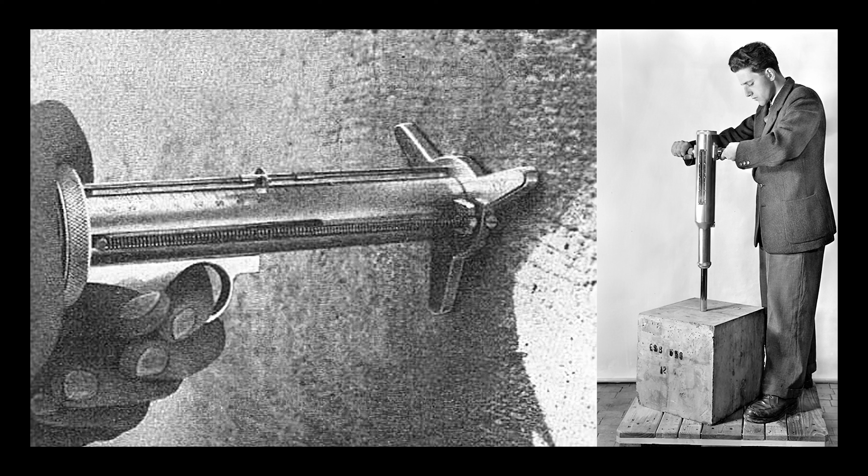Screening Eagle started its contribution to protect the built world back in 1954, almost 70 years ago, with the launch of the first Schmidt hammer. This prodigious invention, done by our invaluable daughter company Proceq, revolutionized the concrete characterization space with an NDT approach, until then limited to destructive testing.

Since, continuous new inventions have populated our portfolio with a plethora of new solutions, such as ground-penetrating radar, half-cell potential, eddy current, and many more. As a result, today, we offer our customers the largest portfolio of portable non-destructive solutions for concrete health assessment.

Alongside this, computing power seconded by Moore's law has continued doubling every second year, and thus continues giving smaller and more powerful portable devices. To give a reference, today, the latest tablet generation has twice the computing capacity of the, at the time, largest supercomputer in 2001, with more than 8,000 processors and an equivalent cost of $187 million.

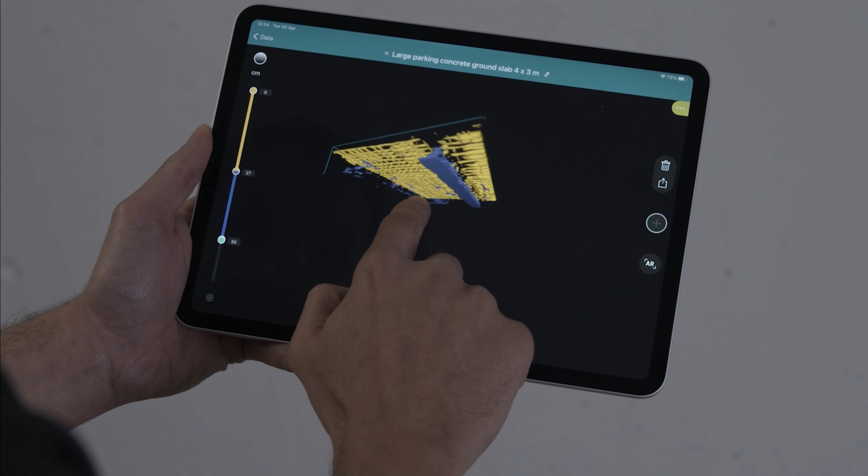Screening Eagle very early saw the benefits of this computing trend and decided to leverage it, thus redefining the way NDT sensors were understood until then. A completely new approach that combined the best of two worlds: unparalleled data collection sensors with powerful and user-friendly software. Today, this approach remains more valid than ever, and since its adoption, it has empowered our users with many new innovations not seen before, such as IoT connectivity, real-time post-processing, augmented reality, and many others.

But what drives all these innovations? Primarily, our self-defined mission is to protect the built world with innovative and true added value solutions. We strive to empower the different stakeholders in their respective roles across the value chain, from inspectors and engineers who seek more efficient methods and better quality data, to also asset owners who aspire for data insights-driven decisions. Secondly, our passion for engineering and our motivation to provide our customers with the best solutions in class.

But why must we care about protecting the built world? The built world provides the necessary infrastructure for our economies, our society, our lives. Bridges, tunnels, airports, hospitals, schools, our homes. All that is the built world.

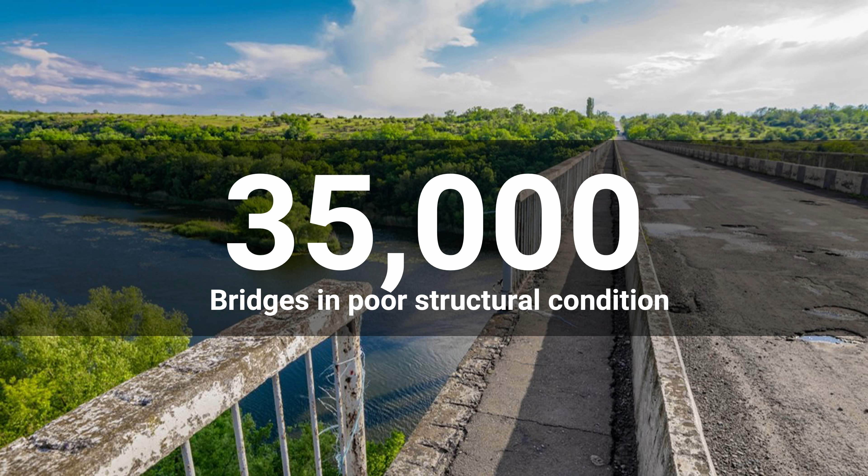One might think of rebuilding everything again, but finance and sustainability reasons speak very strongly against that approach. For instance, the value of the world's real estate reached $330 trillion in 2020. To put this in perspective, this is almost 5 times the capital valuation of the 10 largest stock markets in the world.

In addition, the construction industry continues to be one of the largest CO2 emitters, with a contribution of around 12% of the total CO2 emitted to the atmosphere due to direct construction activities. In other words, reconstructing everything again is not a feasible solution, but rather to develop long-term strategies and implement efficient actions that preserve our existing built world.

Now, an indispensable aspect of protecting the built world is to have an accurate and extensive condition assessment, which initially starts with visual inspections. Visual inspections are the most common type of inspection. They are straightforward and relatively cost-effective, serving as a baseline for the structural health assessment of the asset.

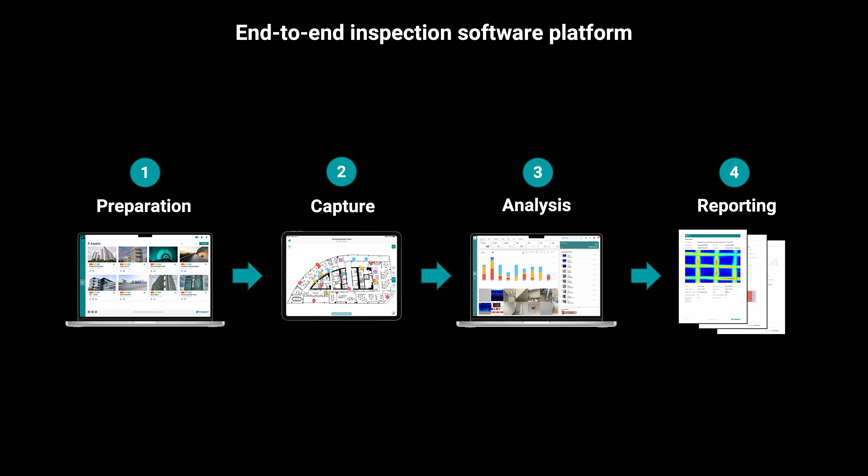Inspect is set up for real-time team collaboration from anywhere at any time. The software helps inspectors and engineers to manage and document their work from job preparation, field data capture, data analysis, all the way to reporting to their clients, the asset owners. All your workflows can be digitalized and customized easily as per your needs within minutes.

Remember, the essence of any inspection is location, and hence why we put location at the core of our solution. That means that all captured data is simply layered on that very location, which we call spot. And here is how the core of Inspect works. To make sure that you don't forget anything while being on site, you can prepare and structure a checklist as a guidance and ensure that you're compliant with local and international standards.

While being in the field, we understand that speed matters for you. The fully customizable, structured data collection empowers you in your everyday job and reduces data collection time to a minimum. It has never been so easy to capture photos of your findings and map them to a location onto a drawing, picture, map, or 3D model.

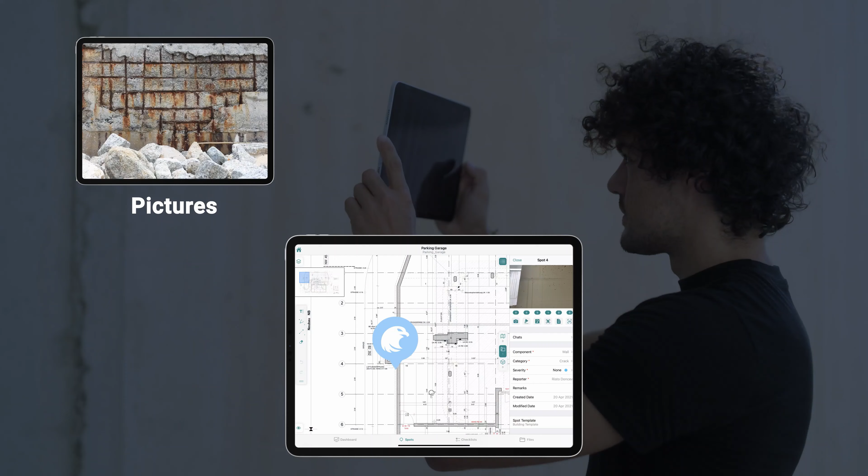Add any additional info that you find relevant to put the data into context. It can be just a comment, 360 picture, video, 3D scan, or sensor data. Any combination that you want and need is possible. All data is stored within the spot and is easily retrievable at any time.

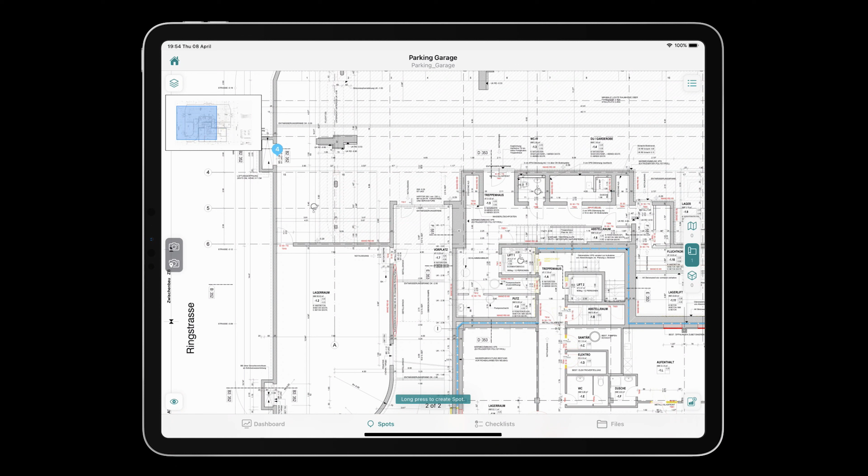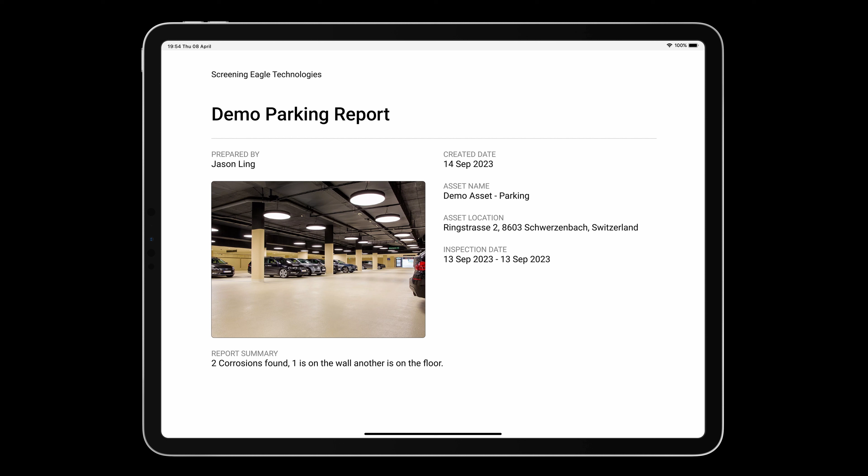The superpower of Inspect comes into play once the field inspection is done. Thanks to the structured field data capture, with only 3 steps, you create a fully customizable and actionable report in a PDF, CSV, or even Word format within less than a minute out in the field itself. That's it. Job done. This is powerful.

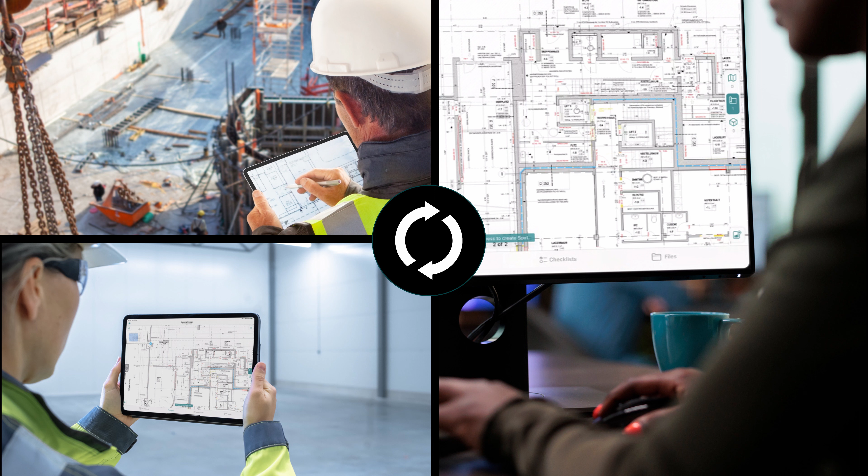This is Inspect. What's more, all of your field data capture is available across different platforms with all your teammates, and everyone has access to absolutely the same data set in real time. This is great. The result of using Inspect? Massive productivity gains along the entire inspection and assessment process saves you time and money, enhanced quality of inspections, and ensured compliance and traceability. And lastly, accessibility of data and documentation even in years to come.

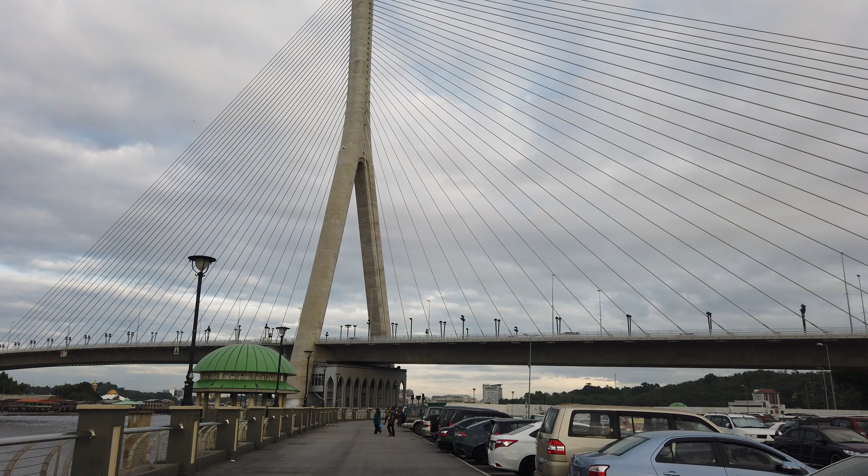To convince yourself, let's hear what our customer VSL out of Asia loves about Inspect. Inspecting the impressive bridges of Brunei is a crucial task for Narciso Pikuriwad and his team at VSL International. In the past, the team used traditional inspection methods, which proved to be time-consuming, with frequent revisits to the same site.

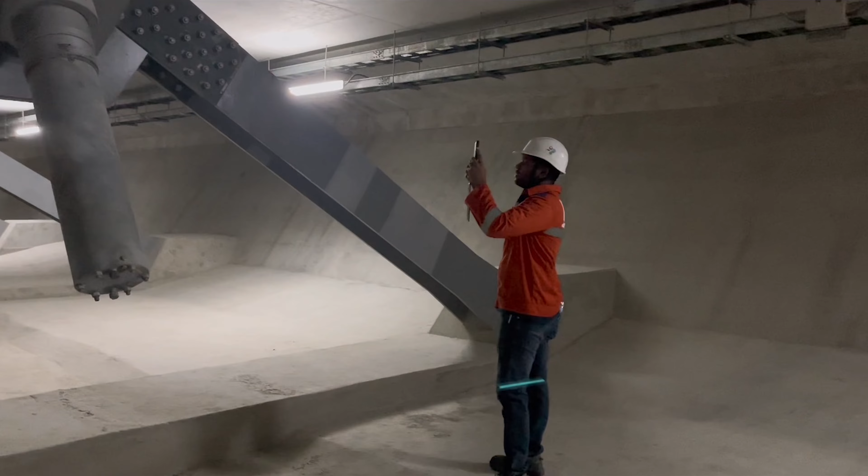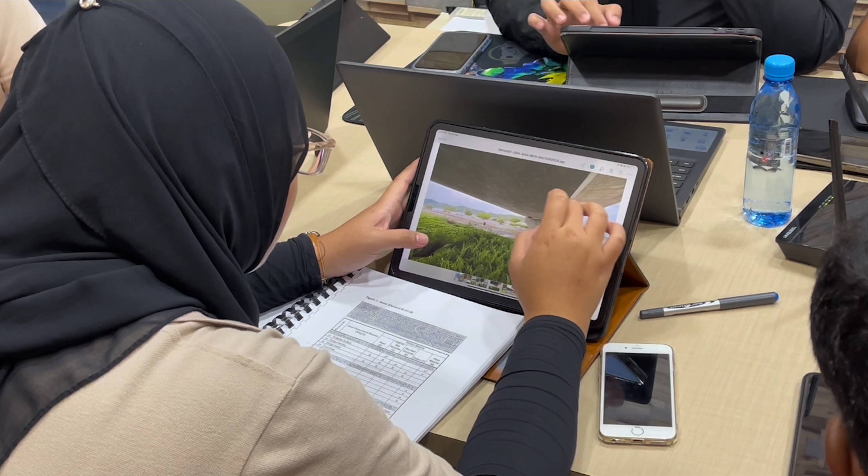Now, Narciso and the team use intelligent inspection software to collect, manage and report the data quickly and easily. All data collected in the field can be viewed in real time at the office, so the inspector is free to move on to the next site. The team's efficiency helps to keep Brunei's bridges safer for everyone. Fantastic to see how Inspect adds value to their daily life of bridge inspection.

Building on all of this, I'm excited to announce to you Inspect 4. This release elevates the ease of use, data flow, and much more, bringing Inspect to a completely new dimension. Inspect 4 comes now with a newly designed iPhone app focusing on the core functionalities for inspectors and engineers to do their jobs even better.

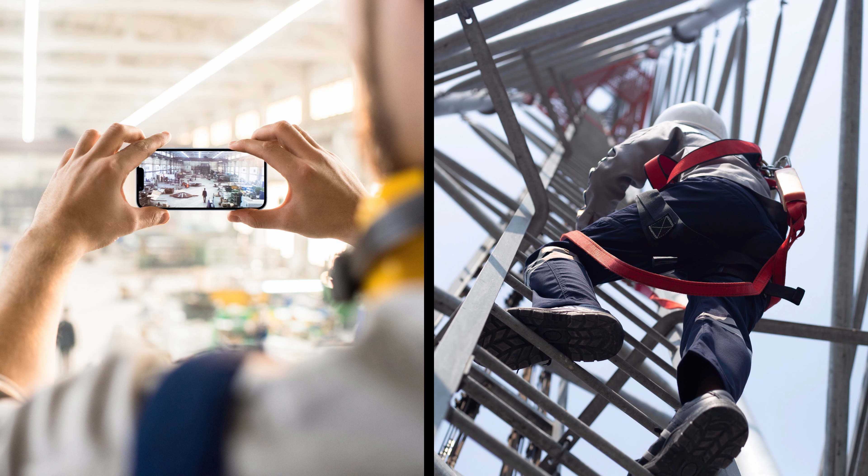Now you can leverage the powerful iPhone camera for brilliant picture taking, enjoy a comfortable user experience with the lightweight of the device, and are enabled to use both hands when required. The newly introduced widgets make you even more productive in the field, allowing you to configure your field dashboard yourself as per your needs, available on iPhone and iPad.

And for those who want to use an even more powerful camera in the field where direct access is not possible, we have you covered with our mighty automatic photo sorting feature. Simply upload your pictures on the web interface, and our software algorithm does the rest for you to sort them out to the exact spot location within Inspect. Just like magic.

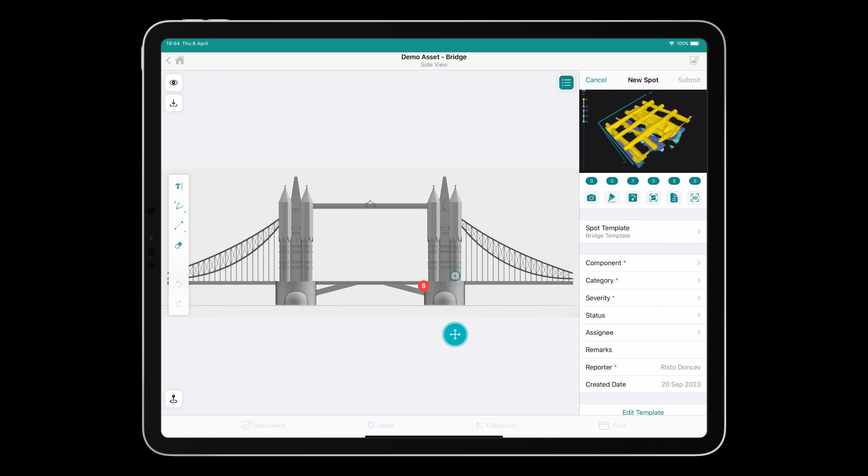Shirley, tell us what else Inspect 4 can do for our customers. Thanks, Risto. That's a big help in gaining deep insights. With Inspect, you can link sensor measurements to any spot. You simply choose the measurement data out of our concrete sensor portfolio, and automatically the raw data and all the metadata is copied within Inspect. This deep link guarantees full traceability for future investigations.

Customers have asked us repeatedly if the visualization of the sensor data can be overlaid onto the 2D drawings. Why is that? Well, because the overlay enhances the contextual information entirely for better assessment. I have amazing news for you. As of now, in addition to the sensor deep links, visualizations of the sensor can now be overlaid onto the 2D drawing. Look at this, for instance.

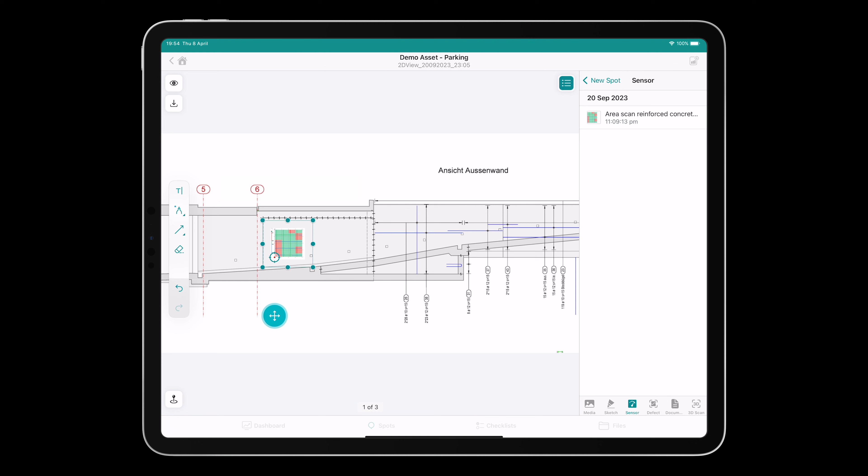It's a heat map of a cover survey on a wall, but without any context, it has limited value. But with the overlay on the drawing, it completely changes the perspective and makes it immediately understandable. Now you know exactly where the hotspots are for repair in real life, and the overlay can be put onto the scale, making your cost estimates easier and more precise.

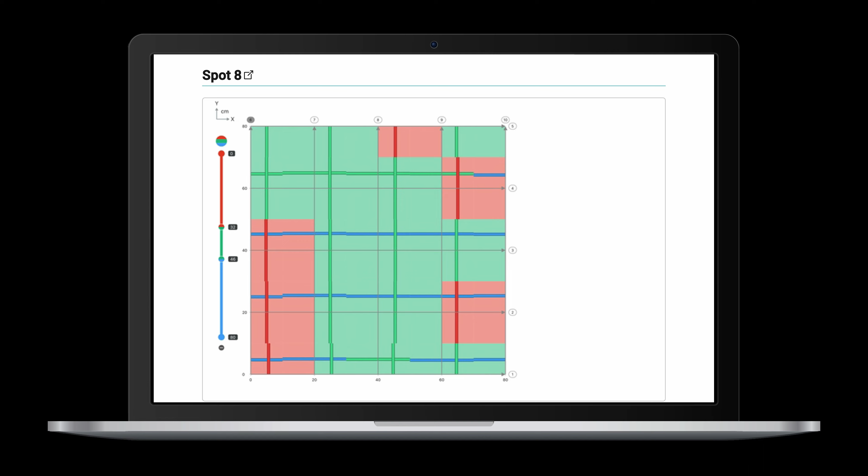You can also adjust the transparency to see the original drawing at the same time, giving you a complete understanding of the full structure. But what's more important is that it massively facilitates and speeds up the reporting process of your NDT scanning. So no need to extract the data or use different tools to put the report together anymore. This is fantastic and demonstrates the power of our Screening Eagle ecosystem.

As Risto mentioned, spots define the point of location of observation. Distinct colours allow you already to differentiate between different defect categories. To enhance visually the information content of the spots, Inspect 4 introduces custom markers and brings customization to the next level. So spot signs can be predefined using different shapes, colours and borders and transparency settings.

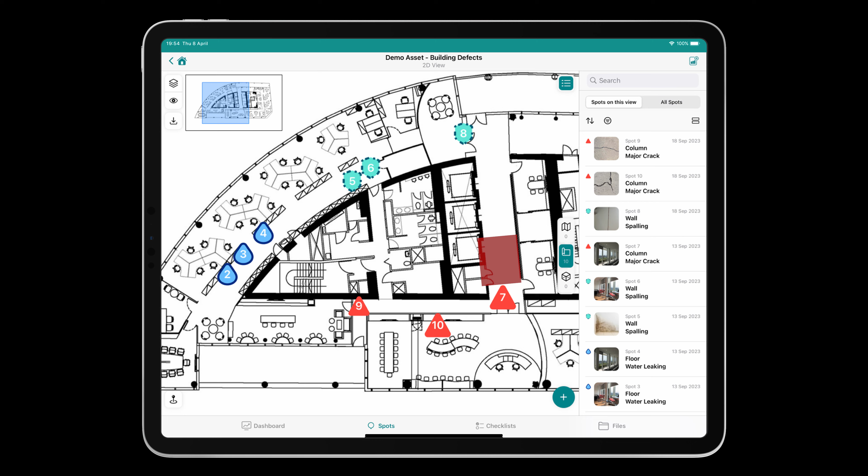And even better, we can draw any annotation to a spot to highlight certain areas. This newly introduced capability shows you at first glance all of your observations as per your company standards and customer requirements without any constraints, and will boost your field productivity and secure the quality. Let's talk about data flow now. For this, I have my colleague Florian, who will tell you what the design and engineering team have been working on for Inspect 4.

Thank you, Shirley. Our customers love Inspect because it's by far the most intuitive and powerful app when you're in the field. Better than every other product on the market. But what if you want to bring data out of Inspect and into your own system? Or what if you want to improve the way that you capture data, but you still need to keep your legacy system?

Well, today we are proud to introduce Inspect API. With Inspect API, you can now connect to any system that you can imagine. It provides information in real time out of Inspect without having to export to Excel. We built a RESTful API that allows you to fetch all your assets, spots, and reports through simple HTTP requests. We're very excited to show you what it can do.

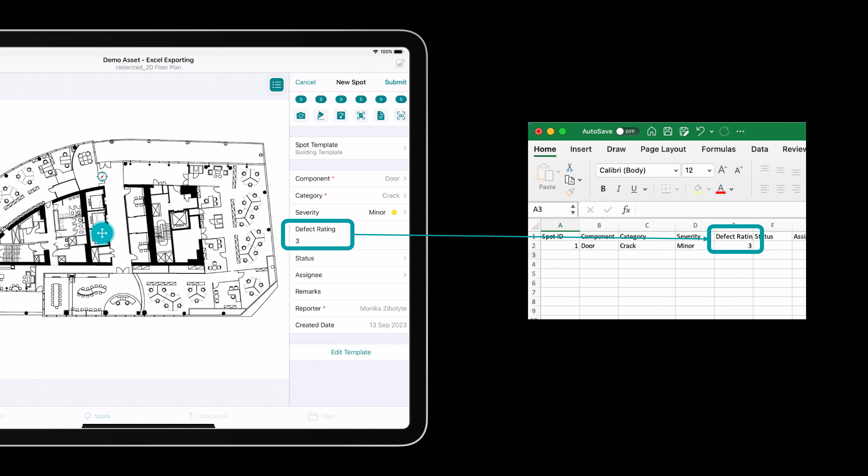To facilitate your workflows further and ensure your company's knowledge is preserved, we will provide Excel integration directly into Inspect by the end of this year. For example, a bridge inspection condition index calculation or periodic asset assessment according to your local standards can be fully used and leveraged within Inspect. Data inputs from the field will be incorporated into your existing files, avoiding unnecessary duplication of work. This will truly bring a new dimension to the whole game.

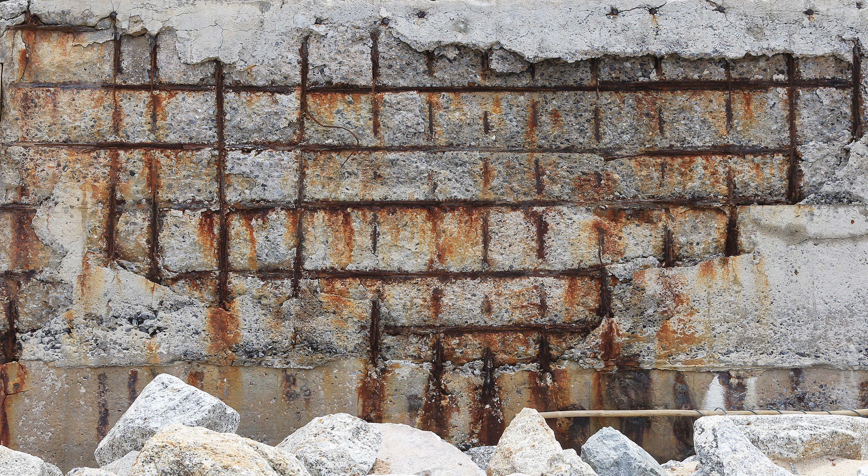Now, despite visual inspections being extremely important, often the findings of those inspections are not conclusive enough, or they just open the door to new questions that require deeper investigations with NDT sensors. In this sense, corrosion is the durability issue that is regularly found and reported by inspectors and engineers in concrete structures. In fact, corrosion is a current major global challenge.

The cause of unserviceability, such as bridge closures or unsafe buildings, and the total cost of repair is estimated to be 0.303% of global GDP. This means $300 billion in 2022 alone. Imagine the GDP of an entire country like Colombia or Finland just disappearing because of corrosion in concrete.

Screening Eagle offers a uniquely extensive portfolio of sensors for the assessment of concrete corrosion. Cover measurement, half cell, resistivity, and concrete permeability are some of them that our customers leverage in their structural assessment.

But now, here is Hussam to tell you more. Thank you, Antonio.

Sometimes corrosion is not yet visible to the naked eye, but there is enough engineering evidence to justify a corrosion assessment. In other cases, especially in old structures or extremely aggressive environments, corrosion issues are very well advanced and visible from the outside. In these cases, the inspector and engineer might want to evaluate the extent of the problem, if there are associated damages to the concrete, like cracking or spalling, and whether the problem is extended into other areas where the effects of corrosion are not yet visible from the outside.

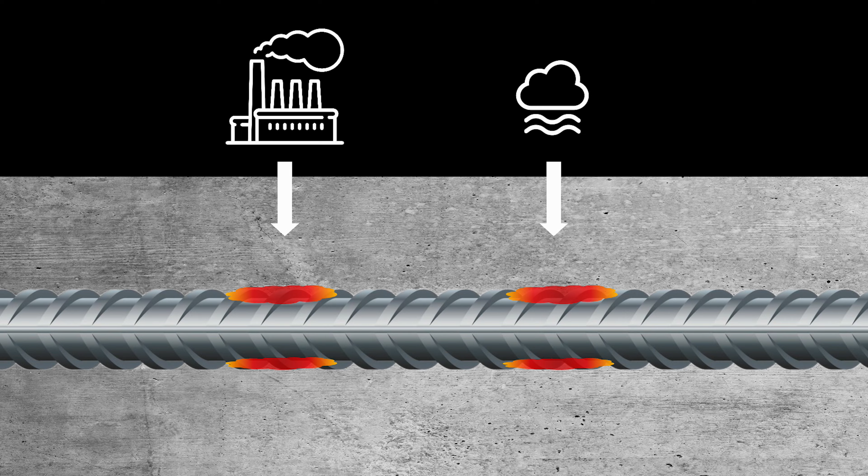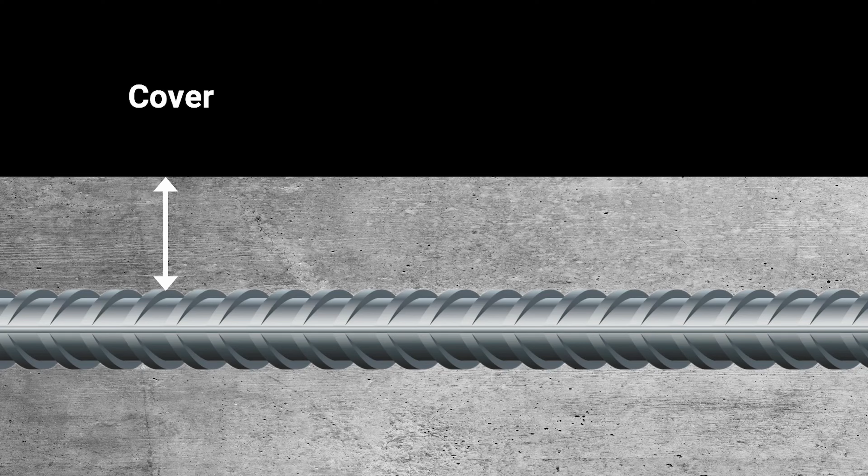Although every structure is different, the factors inducing concrete corrosion are commonly repeated: not enough concrete cover, concrete carbonation, high chloride environment, and other concrete characteristics. There are 3 risk factors increasing the possibility that corrosion will happen in concrete structures. The first risk is an insufficient concrete cover. Indeed, that's your protection along the concrete structural life. The lower the concrete cover over the steel rebar, the faster the aggressive elements reach the steel.

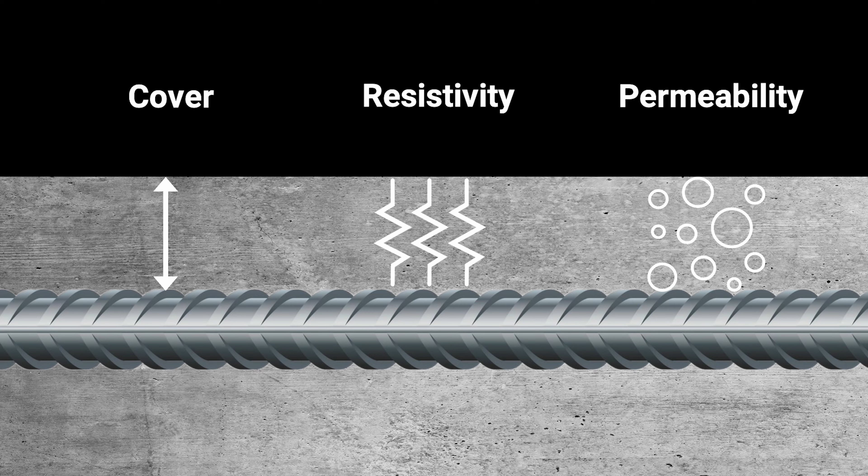The second factor is concrete resistivity. A low concrete resistivity allows the corrosion, if present, to speed up. And finally, the third factor is concrete permeability. A high permeability makes it easy for aggressive elements to penetrate and attack the steel rebar. That's why we recommend a multi-technology approach for assessing those 3 risk factors.

For measuring the concrete cover, the Profometer PM8000 family offers a wide range of cover meters according to your applications, from punctual cover measurements with the newly released PM8000 Lite to mapping large areas with the PM8000 or PM8000 Pro introduced last year. For estimating the concrete resistivity, the ResiPod is the most reliable sensor to use. For evaluating the concrete permeability, the Torrent is the only existing on-site sensor in the world.

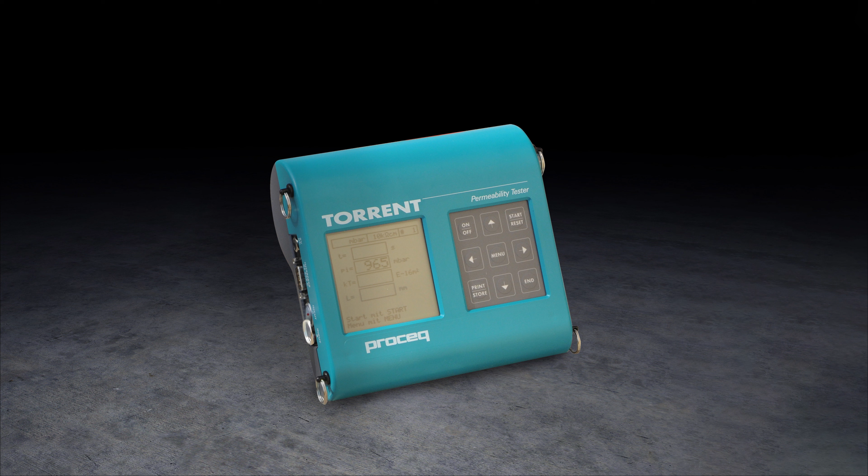Knowing the risk factors is essential to consider concrete strengthening works. But what if the corrosion is already starting? Yes, it might be already active within the concrete, and you might not see it at all. As a preventing action, you should then estimate the likelihood and speed of corrosion. For that, half-cell potential technology is the most proven and standardized technology in the world.

By detecting corrosion early with electrodes, the repair is more targeted, more affordable, and takes less time to implement, making the structure more durable while maintaining its serviceability. We've been the leader in half-cell potential technology with more than 30 years of experience. And we keep innovating by presenting to you today the newest generation of half-cell potential technology.

Hi, Rosaly. Tell us what's new. Thank you, Sam.

Welcome to the Profometer PM8500. The product consists of a half-cell potential sensor system connected to the Profometer app, and it's integrated with Workspace, our data storing and sharing platform. A state-of-the-art wireless sensor system consisting of 2 parts.

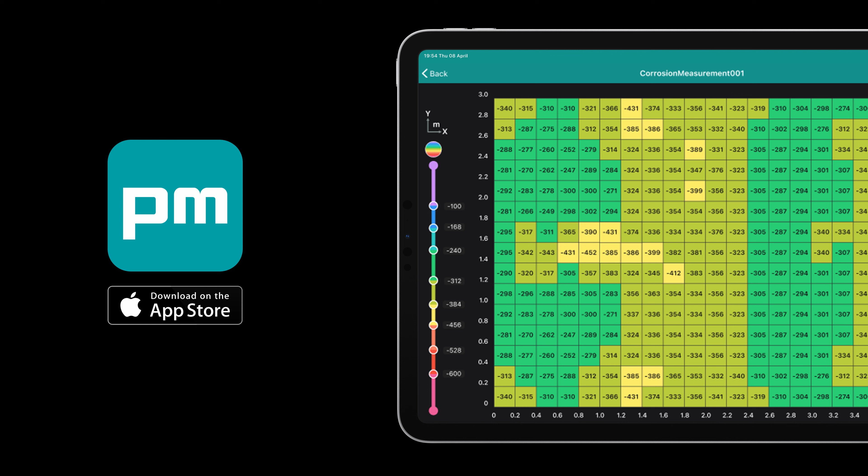Concerning data processing, it's a new world that we offer to you with the Profometer app enriched now with the addition of the Profometer PM8500. We bring you exceptional data visualization with flexible, customizable grid, up to 10,000 square meters large scan capacity, which corresponds to a size of 2 football fields. Perfect for any type of inspections such as underground parking columns, walls, slabs, or bridge decks.

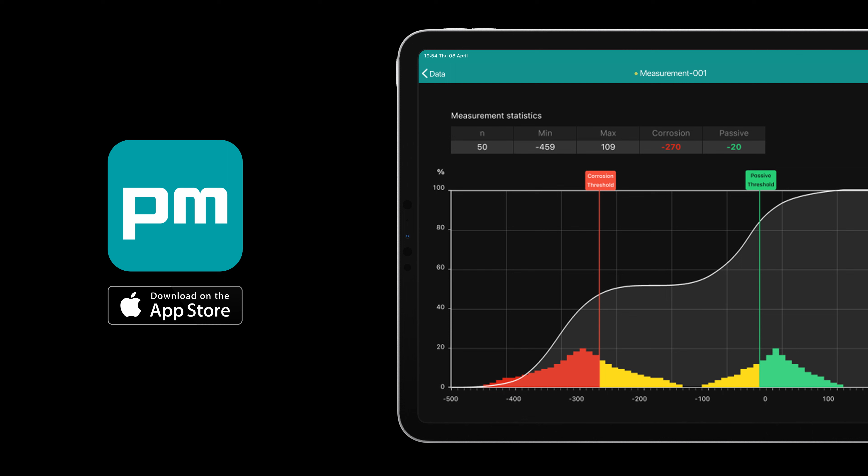The data processing is faster than ever with very easy navigation across the different views. You get real-time on-site results such as the raw potential map, statistics views, and the chipping graph, all helping you to identify the corroded areas for further investigation and repair. With Workspace, you can collaborate and share immediately from the field with your colleagues and clients. Again, we made sure to offer a wide range of options to meet your inspection needs.

This solution is available now. Prices start from 6,490 Swiss francs with the standard kit.

Now, Antonio, back to you. Thanks, Rosaly.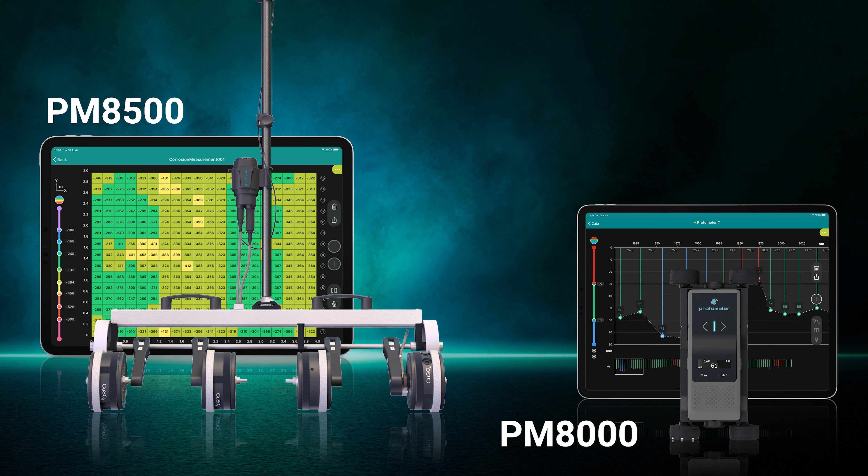The new PM8500 is a fantastic addition to our portfolio of concrete IoT-connected sensors, being also the perfect companion to the PM8000 family for those customers who seek a detailed and complementary solution when performing corrosion assessments. But this is not all. You can as well represent your corrosion measurement directly in your PDF project drawings, thanks to the seamless data overlay in Inspect, a truly innovative solution.

But there is something worth mentioning. The risks for our built world do not only come from aging, lack of inspection or maintenance. Often, project modifications requiring drilling or coring or new project construction needing underground changes represent a huge exposure for our built world. Frequently, those exposures are translated into multi-million additional damage costs, or in other cases, unfortunately, into terrible casualties.

The underground built world is especially exposed to this problem, where there is a whole spaghetti-like network of utility infrastructure coexisting with the lack of reliable data. To tell us more about this problem and our geomatics solution, here is Gorka. Yes, Antonio.

There is a big missing piece, the non-visible space below ground. If only we had an accurate model of the buried network of utilities, we would be able to check before digging and prevent thousands of utility strikes every year. 3 years ago, we entered the world of subsurface mapping with the introduction of the GS8000, an innovative radar-based system able to intuitively provide a solution to any detection and mapping task, from utility locating to advanced geophysical applications.

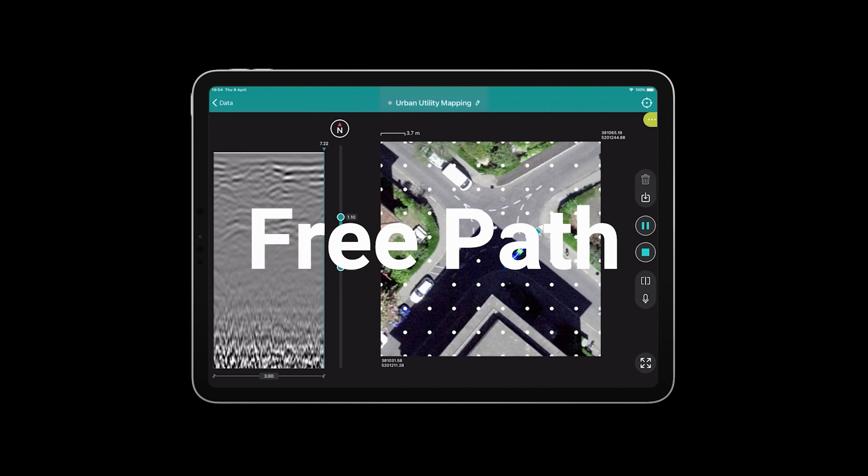David, tell us, how has the market received the GS8000? Hi Gorka. Our customers simply love the GS8000. They love how intuitive it is to use. They love the performance of the step frequency GPR technology. The trade-off between data resolution and depth allows them to use one system for multiple applications and save money. They love FreePath, the unique methodology that made grid scanning redundant, saving hours and hours of field work.

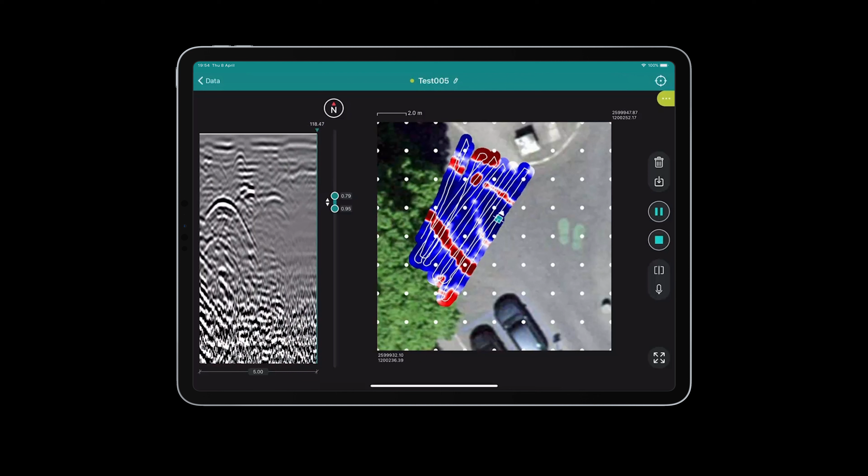They love how the data is processed in real time and presented in a map immediately to avoid interpretation errors, and create a digital copy of the scan site and job done that can be shared with one click to anybody over the cloud. People simply love the GS8000. But Gorka, there's one thing I've got to tell you. Our customers see the potential of the technology, and they ask me all the time questions like, how can we make the GS8000 cover larger areas?

I am glad you asked that, David. This is the reason why we are here, actually. Today, I am glad to introduce you to the new addition in the Screening Eagle subsurface family, the multi-channel GPR system that will revolutionize hand-pushed operations, the GS9000. As you can see, it is very compact and robust, made of lightweight carbon fiber that keeps radar signal intact. It is a true Swiss-made piece of art. The principles are the same that made the GS8000 famous.

Versatility, thanks to the ability of stepped frequency GPR technology to provide the best detection trade-off between resolution and penetration. Efficiency, to scan your own path freely and visualize results as a live tomography in a map. And simplicity, with a user interface based on simple gestures that allows you to digitize and share data as easily as you could ever expect.

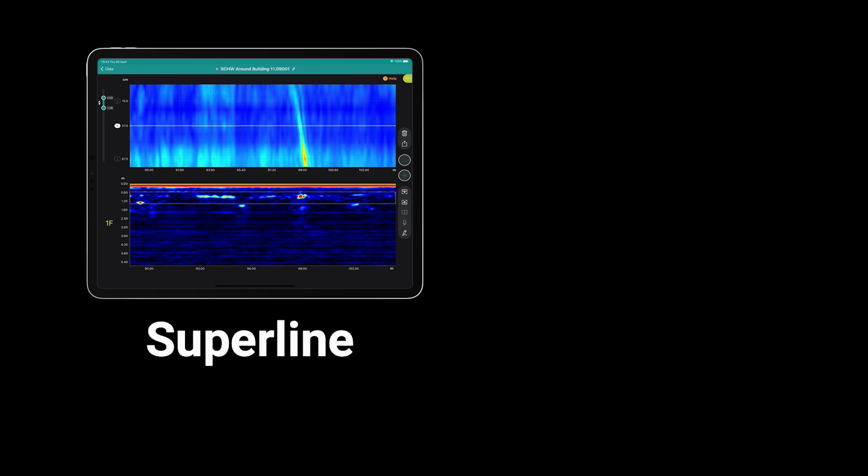And it is up to you whether you visualize the information as an infinite swath that we call superline, or in an accurately georeferenced tomography that we call free path. Both maps are live. You just need to swipe on the screen to change. As the result of all of this, the same area can be covered up to 30 times faster, bringing a completely new level of productivity to the field.

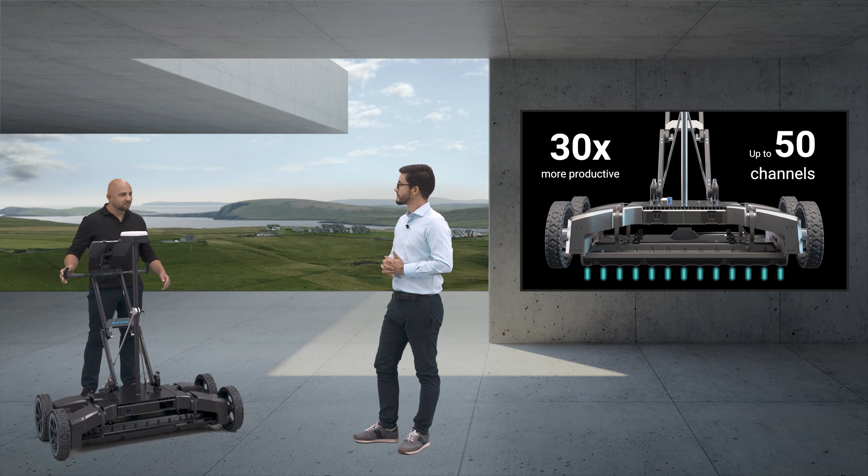This is awesome. I've been dreaming of this for years, and I'm sure our customers will love it too. I can imagine how this will simplify GPR operations before digging or trenching and speed up all types of surveys. No matter if utilities, geology, archaeology, bridges and structures, all in one system. But now, Gorka, I double down my question. Can you make it work on a bigger scale? The answer is indeed yes.

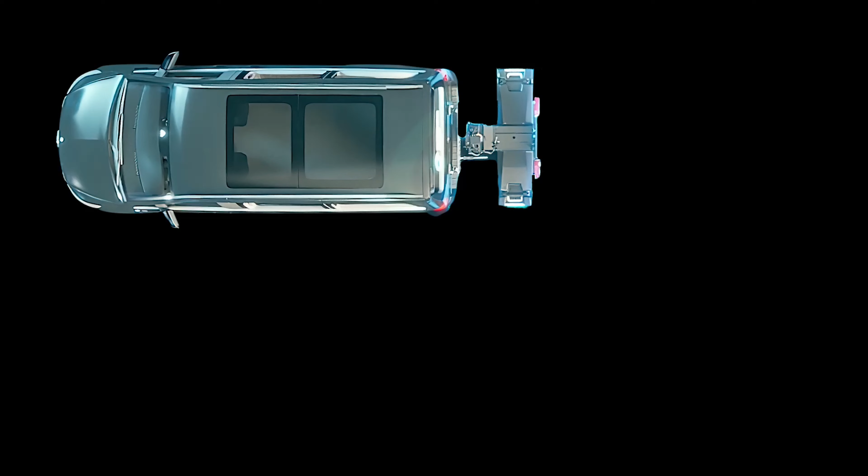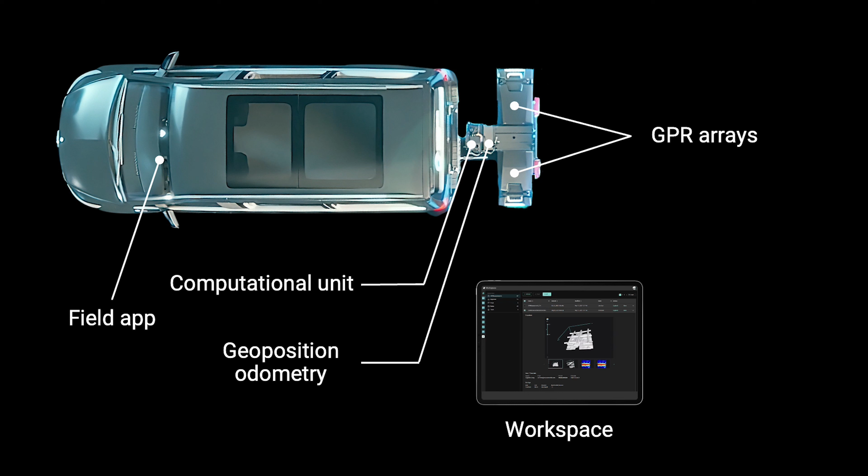Now, let me introduce you to the first true mobile mapping system for the underground, the GM8000. A fully equipped system to bring subsurface mapping into a new dimension, thanks to the perfect integration of all the pieces that only Screening Eagle could combine. Multi-channel GPR array sensors, precise geopositioning and odometry, a powerful brain unit to compute all those data at high speed, an intuitive app to control the whole system during data acquisition, a virtually limitless data management system called Workspace, and the most powerful analysis software, GPR Insights.

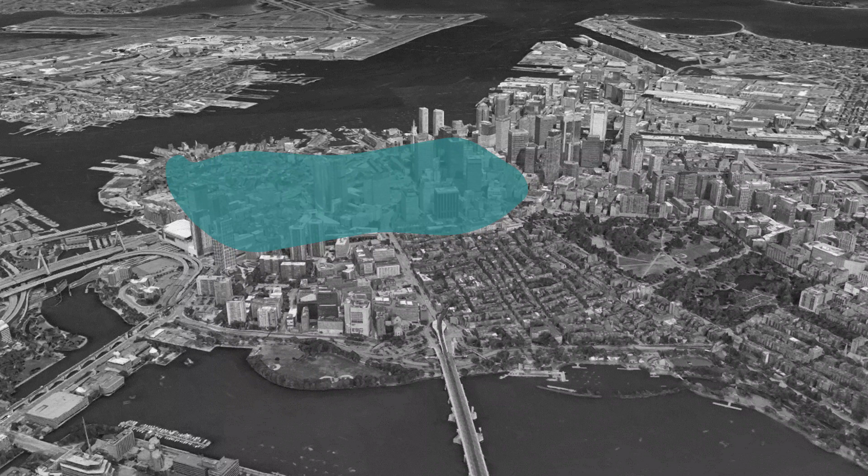The GM8000 is designed to be towed by a vehicle. It is super simple to mount, even by a single person, and in less than 5 minutes. Thanks to the Screening Eagle patented GPR technology, with its broad bandwidth of stepped frequencies above 3 GHz, you always keep a high dynamic range, which speaks for the highest data quality across all channels, and now also at highway speed. This allows the GM8000 to cope with utility mapping, geophysical or archaeological surveys, as well as bridge or pavement analysis projects, with nothing else than a simple click out and click in of the corresponding GPR array module.

There are two modules, GX1 and GX2, tailored for near surface and deep detection respectively, to have you always covered. And you know what? The modules can be swapped with the GS9000 because they are the same. It is a truly modular system. But this is not everything.

When mapping cities, there will always be buildings or canopy where GPS positioning is just not enough. Even when combined with inertial sensors, geopositions rapidly drift in tunnels or indoors. The answer to this is visual inertial positioning. 3 technologies combined and integrated into a dependable street mapper that knows precisely where it is, anytime, anywhere.

Now, you will be asking yourself, how can I visualize all those gigabytes of geophysical and geospatial information? Very simple. They are accurately plotted into a map in your field computer. No, not just a GPS trajectory, but a live time slice, so that you do not miss out on anything as you are driving. So, to your question, David, the GM8000 is more than ready for the challenge of mapping the subsurface of complete cities and highway networks. Now, let me recap in a short video all the new solutions presented so far.

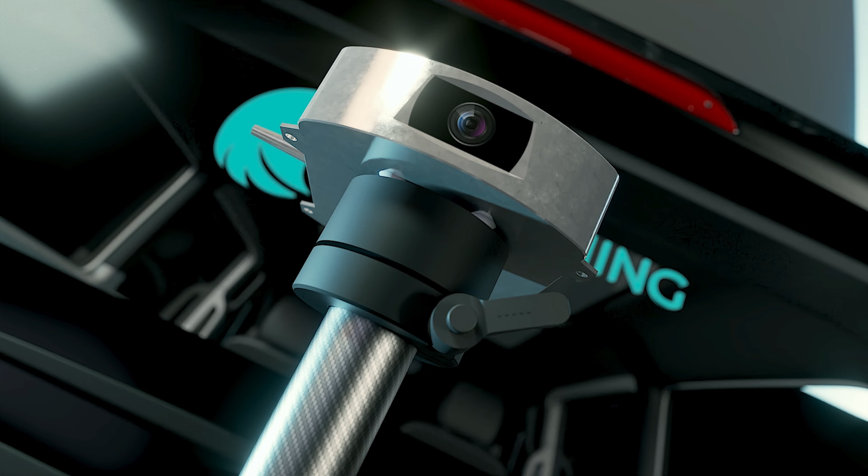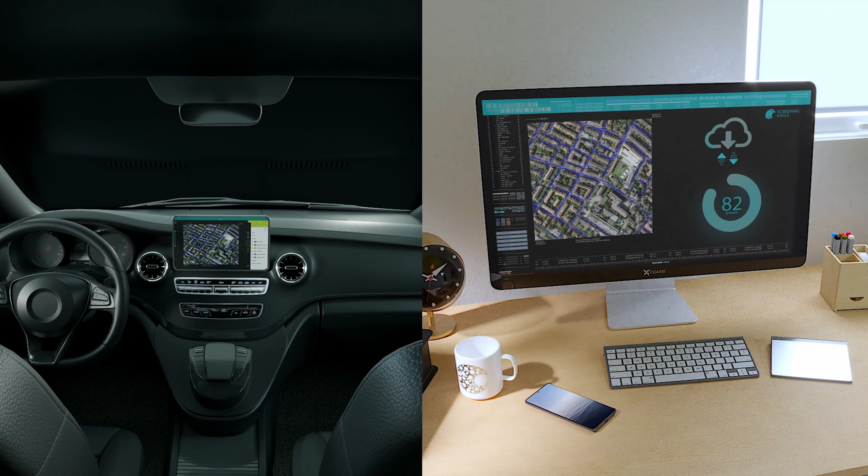Amazing. This opens up a completely new dimension for our clients. Now I can see the digital twin of the underground becoming a reality. And I guess things become tricky here. What about processing all that data? I hear the current pain in the industry, shipping hard drives from site to office, computers getting stuck while processing large amounts of data, data security concerns, or even worse, data losses. Tell me, is there a way of bringing a superior user experience when sharing and processing large amounts of data?

Absolutely, David. We are very aware of these common issues with big data, which are not exclusive of GPR, by the way, and we aim to provide the best possible workflow no matter what. A workflow that begins with the simplest upload process you can possibly imagine. Just select your recipe and let the magic happen. By doing so, a sequence of predefined tasks will run automatically behind the scenes. No need for manual pre-processing. Your subsurface project will be ready to start the analysis as soon as you open it. This and much more will be possible with GPR Insights.

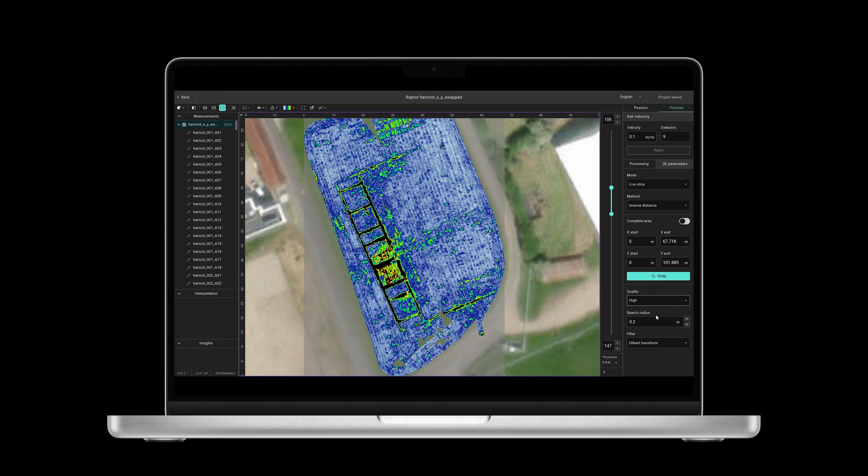Last but not least, Insights 3 is not limited to data from Screening Eagle systems. It is also able to read and process data from almost any third-party GPR sensor, single or multi-channel, enabling survey companies to manage large fleets of multi-brand equipment with one powerful and intuitive software solution. All these are just some of the great competitive advantages that make Insights 3 the most advanced GPR analysis software in the market. GPR Insights 3 will be available in October. Now back to you, Gorka.

Thank you, Jesús. The delivery of GS9000 and GM8000 units starts in January 2024. Place your pre-order now to be at the top of the waiting list and be one of the first proud owners of the most advanced multi-channel GPR system in the market. If you cannot wait to experience them in your own hands, don't miss the opportunity and join us in our worldwide roadshow that starts today. There will surely be a location near you. See you on the road. Back to you, Antonio.

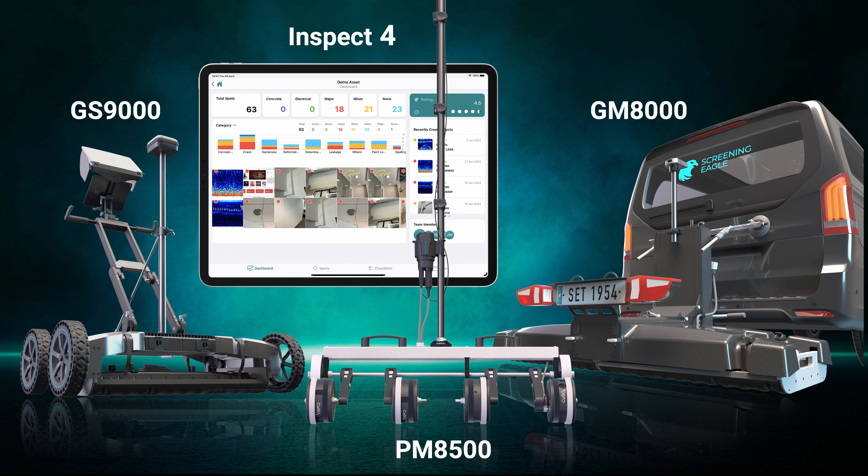Thanks, Gorka, and thank you to all our presenters. What an incredible day of announcements about new solutions that are truly essential to protect the built world. Inspect 4, PM8500, and the revolutionary GS9000 and GM8000. These incredible solutions each offer so many great capabilities and work seamlessly together, thanks to our unique ecosystem and the unlimited possibilities offered by Inspect, all in a way that only Screening Eagle can deliver. I'm proud of all the teams and hard work that went into making today's announcement possible. And I'm also excited to see the amazing projects and applications you will do with the new solutions.

I'm sure you want to know more about our solutions and how these could help you in your day-to-day. Do not worry. Our teams will hit the road starting from this week and will complete more than 60 roadshows and trainings in 50 different cities around the world.